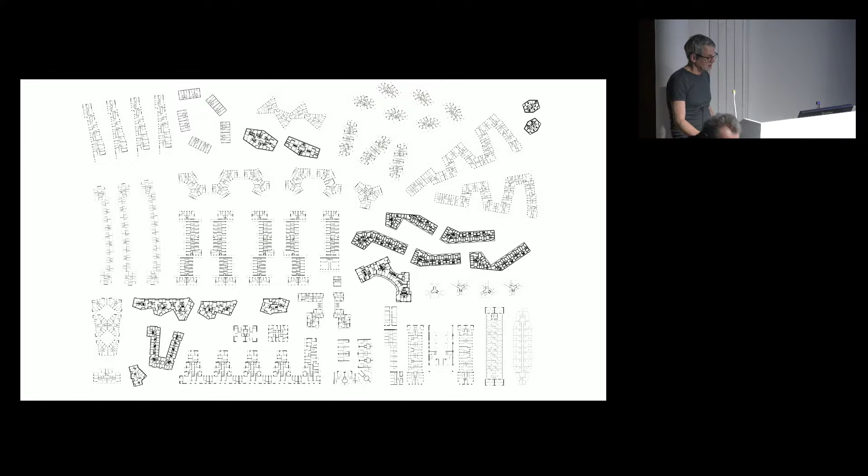Our aim was always to try and design an urban structure according to rules, like a woven material with a harmony that repeats itself and so generates its own pattern. Or to put it differently: if you were to combine our projects together into a fictional city, you can hopefully see how they differ from each other in terms of their internal logic.

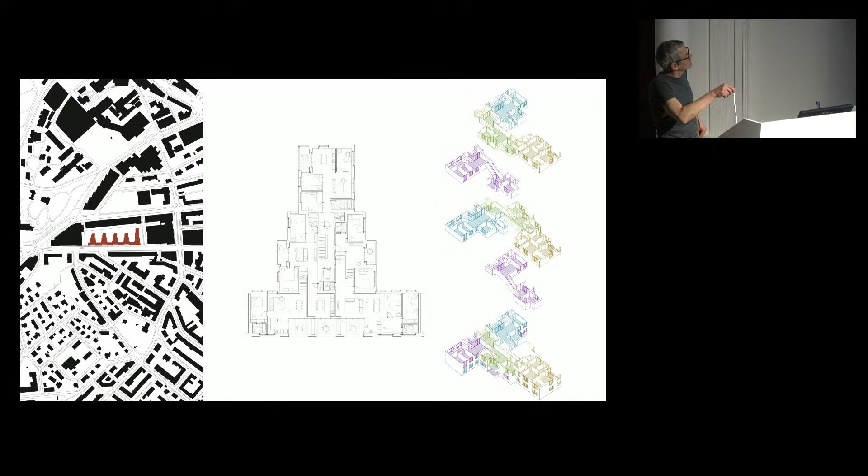For instance, during the test planning for the Oberzelg housing project in Winterthur Sennhof. After finishing the test planning in 2010, the project was suspended for 3 years. And when we started the planning again in 2013, we felt that the spaces of the buildings were not precise enough.

The angled structure symbolized driftwood that had been washed up on the construction site by the river, basically an abstract idea that had very little to do with spatial thinking.

Refining the project, we began to question our first approach. Basically, we turned everything inside out. Beforehand, the volumes of the buildings were determined by the internal layouts. Afterwards, it was the sequence of outer spaces that now defined the center of the housing estate.

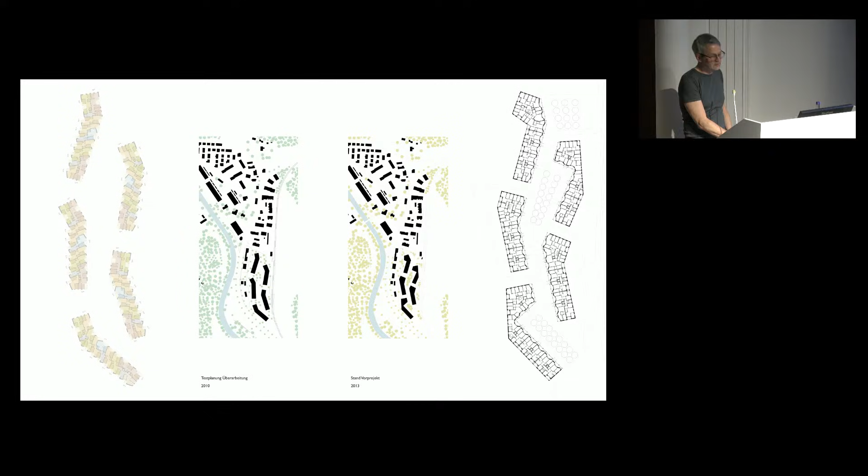The impulse for this involved 3 elements: the public space leading to the railway station, a lane as a threshold to the courtyard of the housing project, and another lane leading to an open space facing the landscape.

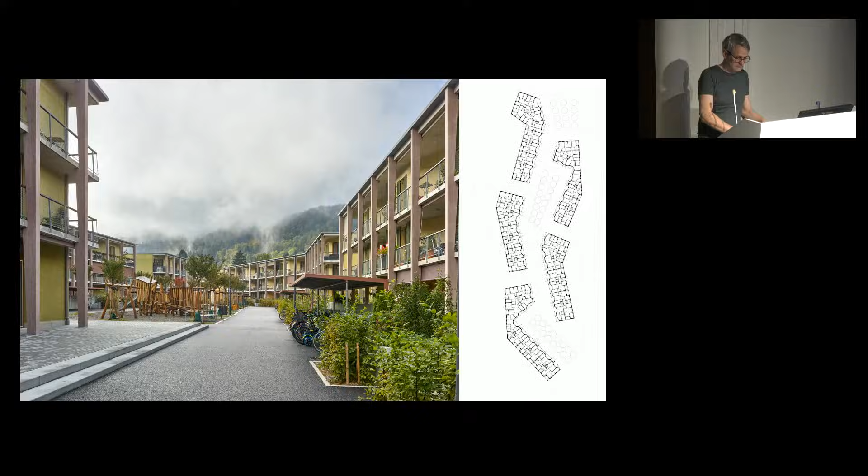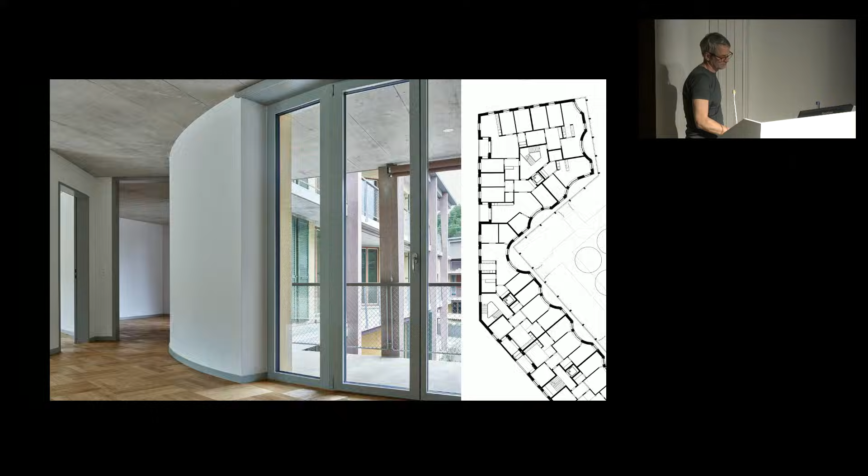Essentially, we cut the outer spaces into the buildings, clearly expressed in 2 volumes where the building mass is reduced to the depth of a room. This project fixed our idea that outer spaces have a greater impact on the design of a housing complex than the buildings themselves.

In 2013, we won the open competition for the Maiengasse residential development in Basel. The building site is located in a courtyard in Basel, close to the Ringstrasse in Greater Basel, not far from the Rhine. The courtyard had formerly been used as a workshop yard with a wooden shed in the middle, surrounded by old cars and other junk. In one spot, someone had made themselves at home—a workshop yard, but at the same time with a domestic touch.

The aim in this case was to try and keep this semi-private, open atmosphere. Our concept consisted of a bracket that spans a courtyard within the courtyard. At the same time, this architectural device encloses and organizes the outer spaces.

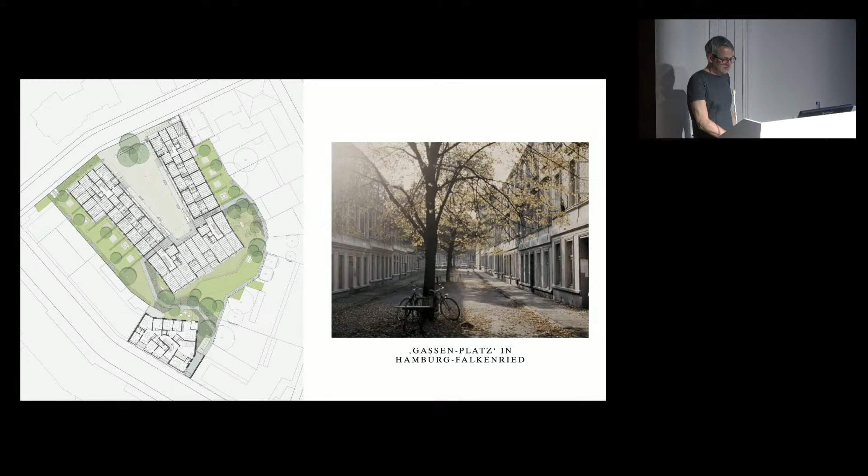Green areas run along the outside circle of the perimeter building block, serving as private gardens for the flats and the children's nursery. In the center is an open courtyard, a street space available for residents to use as they want—meant to provide scope for possibilities, empty and therefore flexible. Added to this, the closeness of the communal areas and the private living space along the courtyard required an architectural answer, a threshold that clearly marks the crossover from private to public.

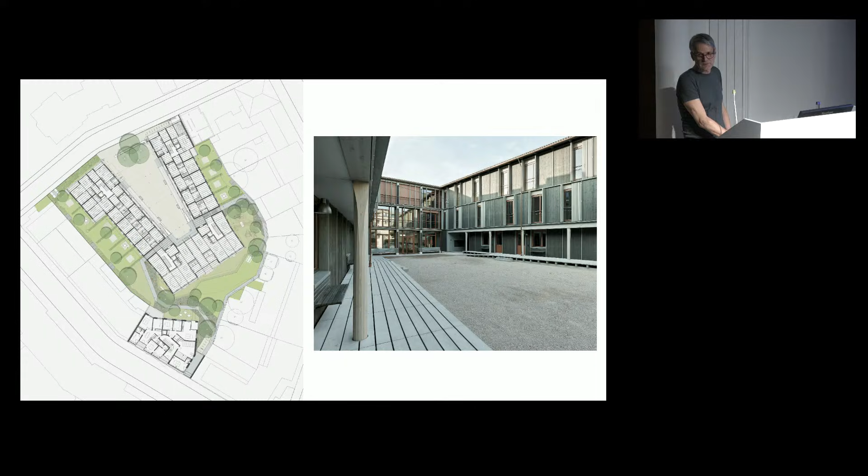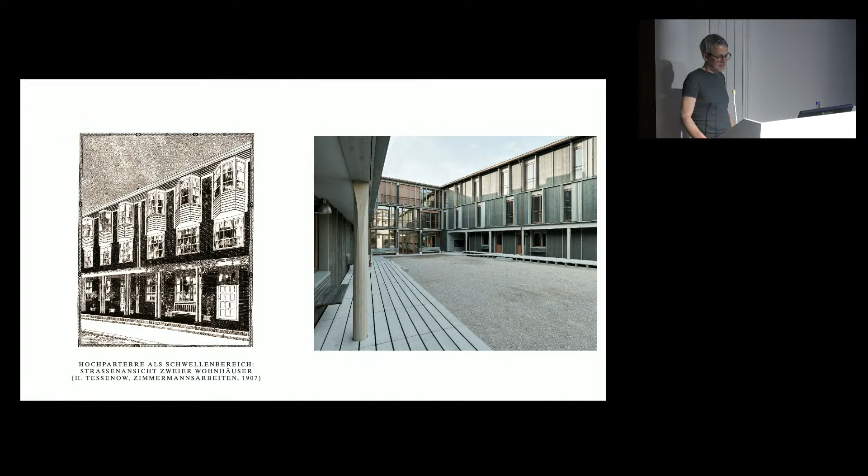By inserting a plateau, we created a higher ground floor and moved the facade back to form a covered entrance area.

Along those areas, we developed maisonette flats that extended over 2 floors. The entrance to the flats leads directly into the kitchen diner area. The space then became more and more private, with the living space located further back and the bedroom on the other floor.

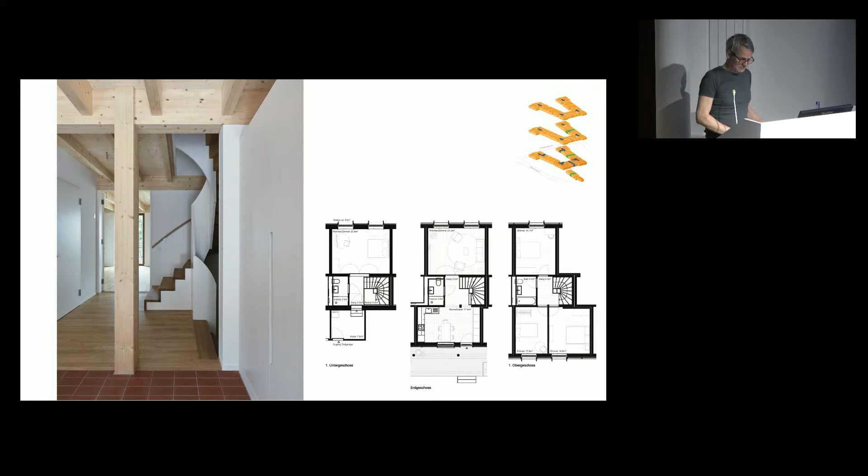The key thing is the empty middle, with the houses grouped around it, which provides a stage for the residents to then fill. An empty middle is always undefined. It's not us who say how it should be used. Instead, it's the community, the residents, who decide how to adapt it.

Our Kuppe project in Horgen is similar to Maiengasse. Horgen is located on Lake Zurich, and the site has an incredible view, which is why most of the existing buildings in the area face out to the lake.

Our development is different. It is self-contained, taking an opposite approach. The clients wanted to promote the feeling of community, of living in harmony with nature.

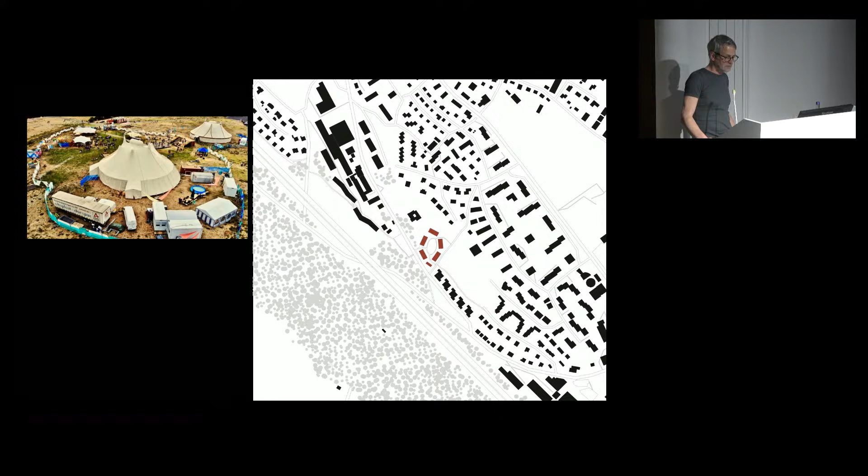The idea, therefore, was to organize the housing units in the form of a circle of wagons. As in Basel, the hope was that the middle would focus an idea of shared community.

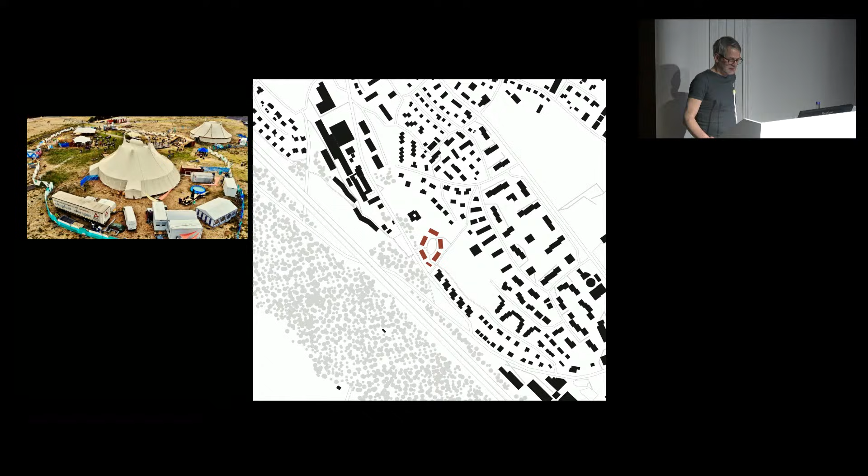The development is part of a new neighborhood that will be built. The neighborhood is connected by a path that loops around the hilltop, and that is where we have situated our houses. As you can see, the houses are grouped around an empty meadow.

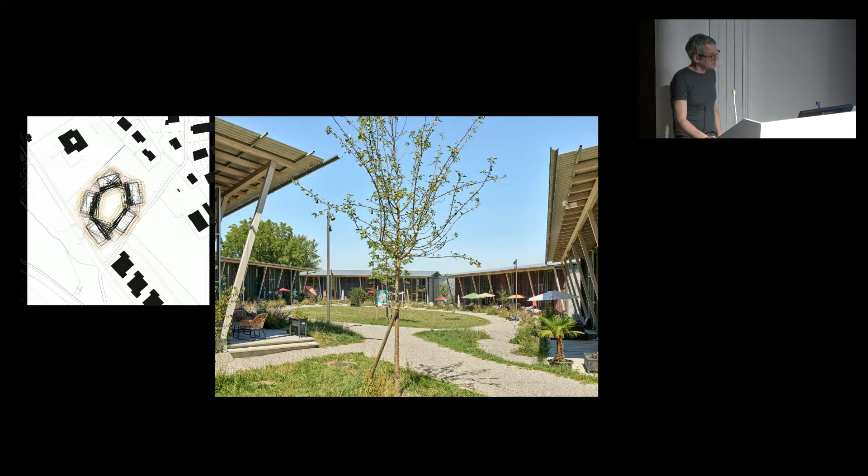The precise setting was a result of a long thinking process, where we tried to find a balance between spatial enclosure and openness to the landscape. How we then placed them represents a snapshot in time.

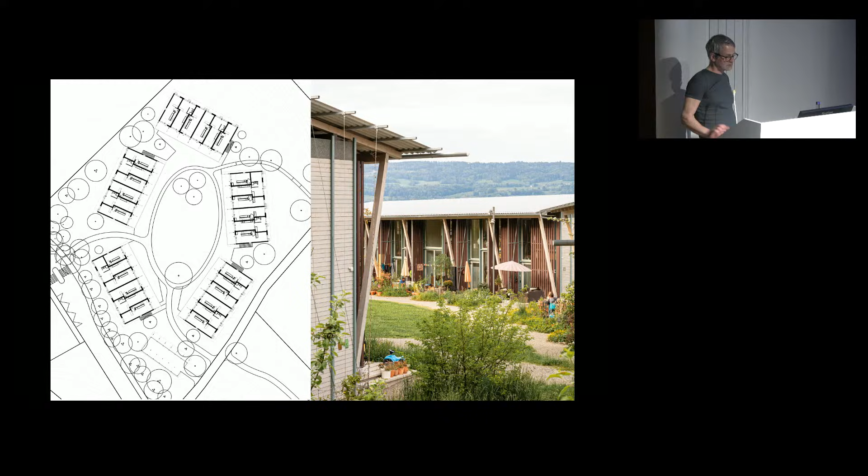The guiding idea was to express something temporary, a sense of lightness. They are additively bolted together, giving them a kind of bricolage effect.

We were not particularly interested in which way the flats faced. Some face to the lake, others to the mountains. The houses are built with bulkheads that radiate out in the landscape on all sides. All the houses are roughly the same.

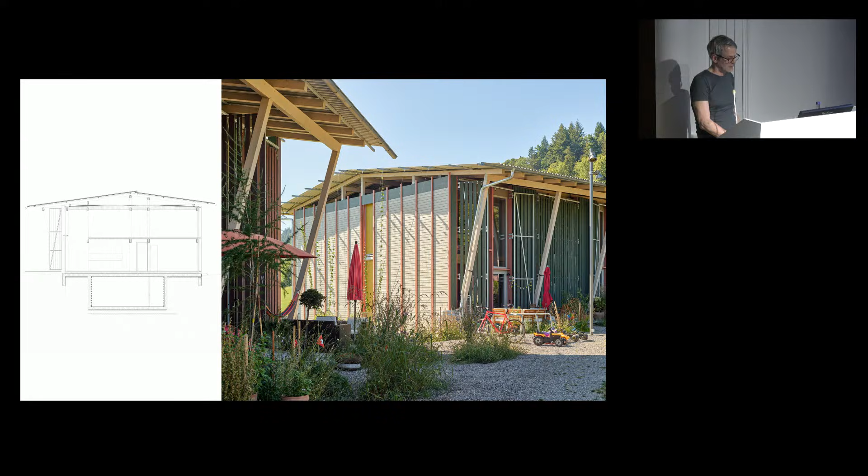Once again, this area in front of the houses was crucial. The overhanging roof protects the transition from the house to the garden, where the entrance to the flats is also located. The large doorway gates create a distance to the neighbors.

When opened out, they act as a blind to next door forecourts. When closed, they signal privacy when wanted.

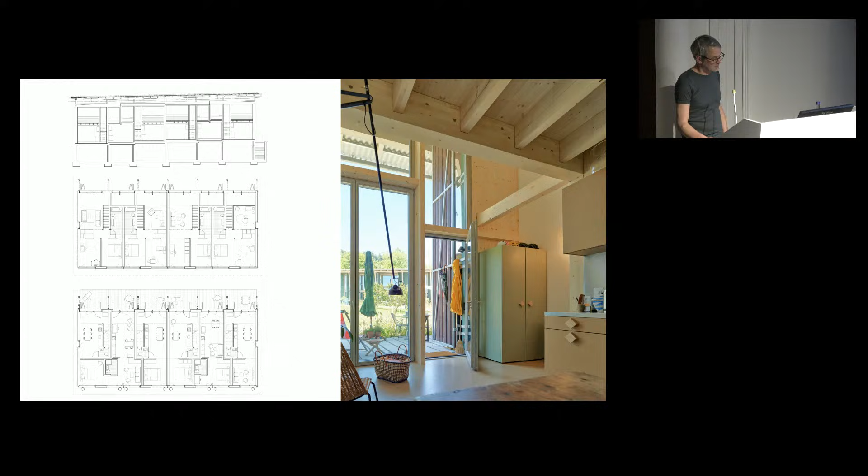Each unit is made up of two maisonette flats, making what I think in England you call a granny flat. The functional program is designed to let people on their own live right next to two families, creating a multiple generational living environment. Each unit has a two-story room at the entrance, followed by the kitchen diner space.

The flats are distinguished as a continuous space that can be furnished as the occupant wishes. Here, for instance, this wardrobe, as in the build before, is on rolls, and you can move it around.

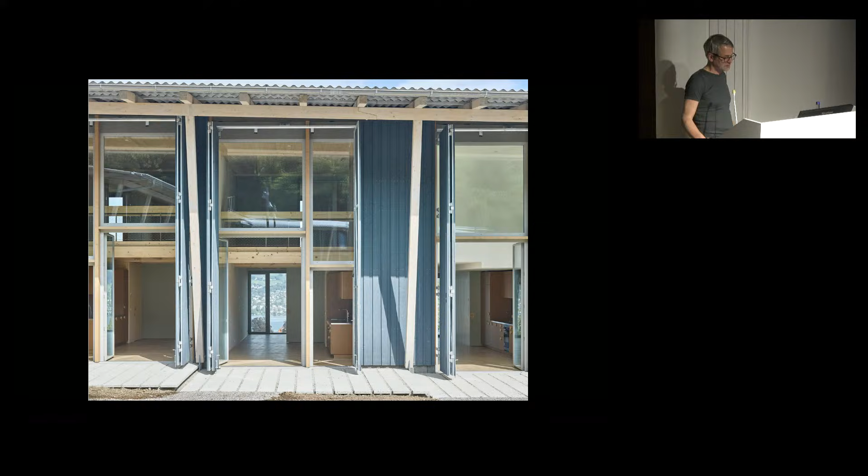The key idea is that the residents can switch as they want between privacy and community. Even in the most intimate place, you are part of the community. Here, the double folding doors from the middle, in the background, the lake.

As said at the beginning, our current project tried to take this thing further and to modify and refine it. The ideas developed in the two previous examples are refined in the Storchen housing project in Ettwil. This is a new project that we won last year as Studio Sintzel.

Working in the new constellation, what we now often do is take approaches from the Sintzel era that we reacted to and developed them further. Again, the important factor is that the individual buildings relate to each other through the outer space, thus forming a large-scale whole.

Huttwil am See is located near Zurich in the countryside. The village is not connected to the railway network, meaning that public transport is patchy. The key thing for the clients is that the development nevertheless attracts urban people who will enjoy living together in this location.

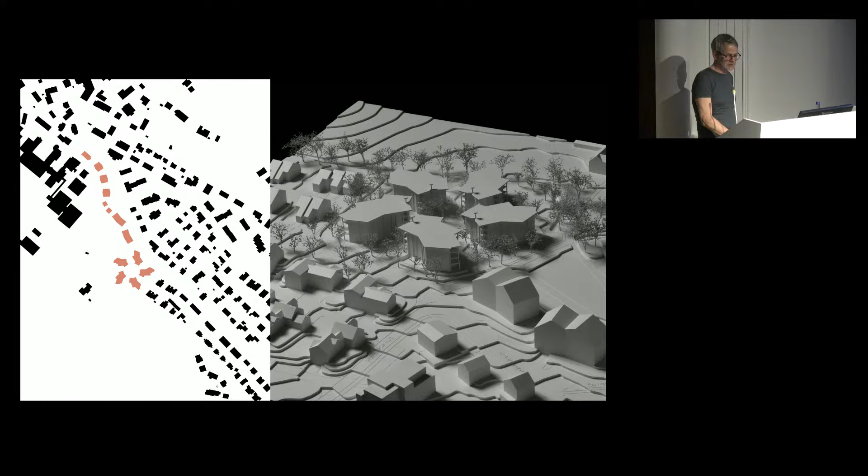The setting is incredibly simple: 5 identical structures enclosing a communal space, large enough for the residents of the 50 apartments to fill it with life. A path leads from the street into the settlement, past all the buildings, and back out to the countryside. The landscape begins in the space between the houses.

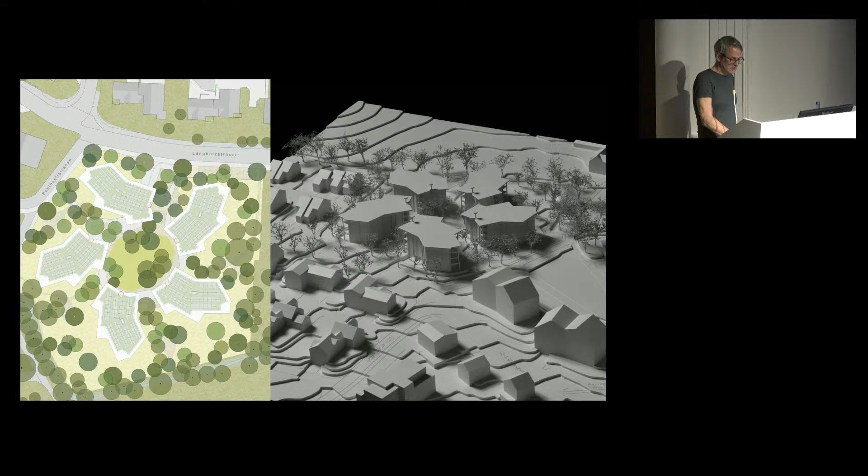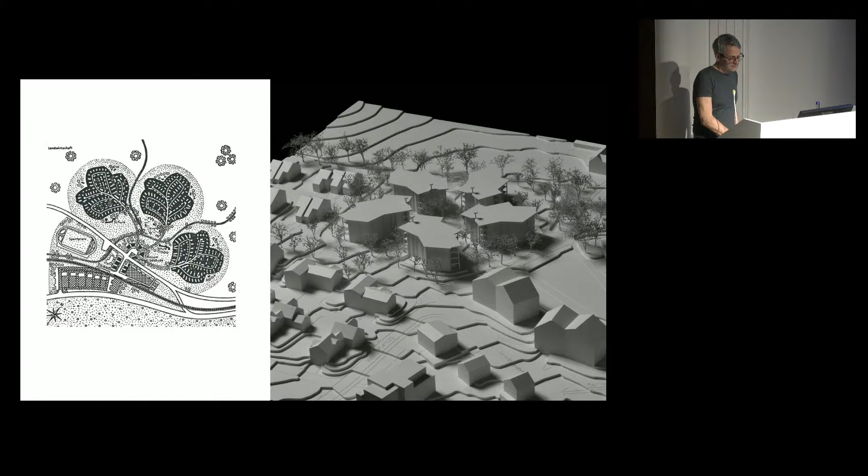A grove of trees creates the transition to the natural surroundings. The result is an urban flower, similar to Albert Heinrich Steiner's concept of the garden town expansion of Zurich in the 1930s. The rows of houses are positioned like urban blocks so that nature can be experienced within the housing complex.

In terms of social space, all levels of community have their own outer areas, with the open middle point offering a shared range of possibilities. On the ground floor, an arcade provides covered space for the residents. The arcade also houses a communal room, laundry rooms, and hobby rooms.

Hidden among the trees are playgrounds for the children, and the path leads to the brook and the neighborhood settlement. The contrast is with the individual views of the landscape from each flat out into the countryside.

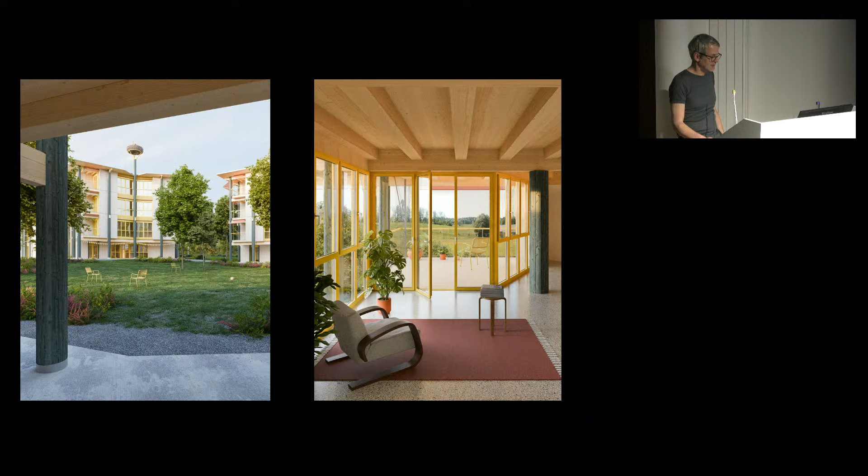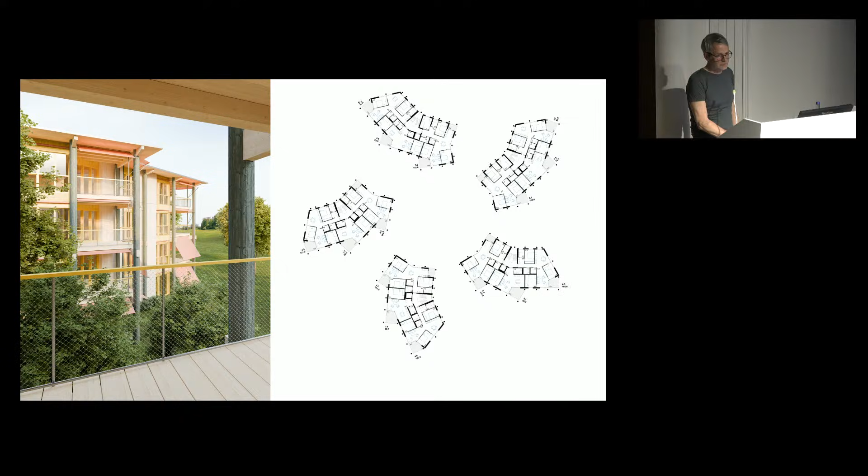The rotation of the architectural volumes around the undefined middle point and the fanning of the layouts creates a rotation with the buildings themselves, a snapshot, if you like, of a circle dance. Hence the name of the project, Syrtos, a Greek circle dance.

The pièce de résistance of the design is the fan floor plan, with two large flats embracing a small one. The fan shape allows the small flat to face two sides. The large flats face three or even four sides.

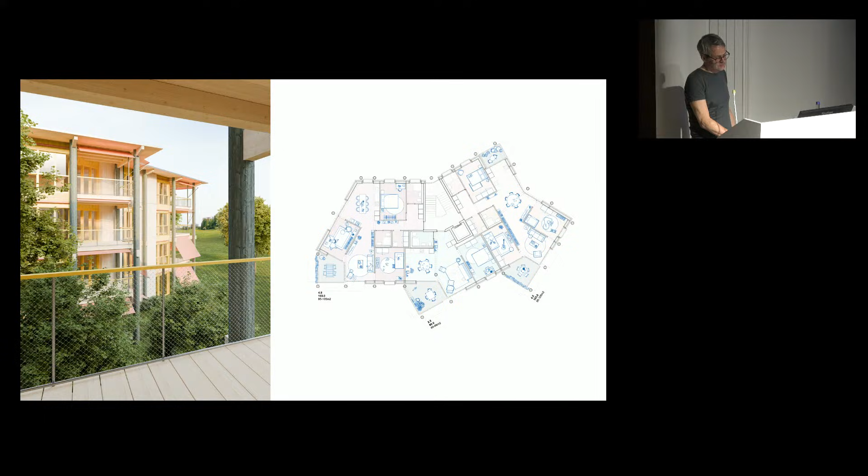We designed the project as a timber construction to give the facade depth. The structural timber columns are situated on the outside. At the angle, the column rises above the level of the roof and supports a stork's nest, hopefully giving a coexistence between animal and humans.

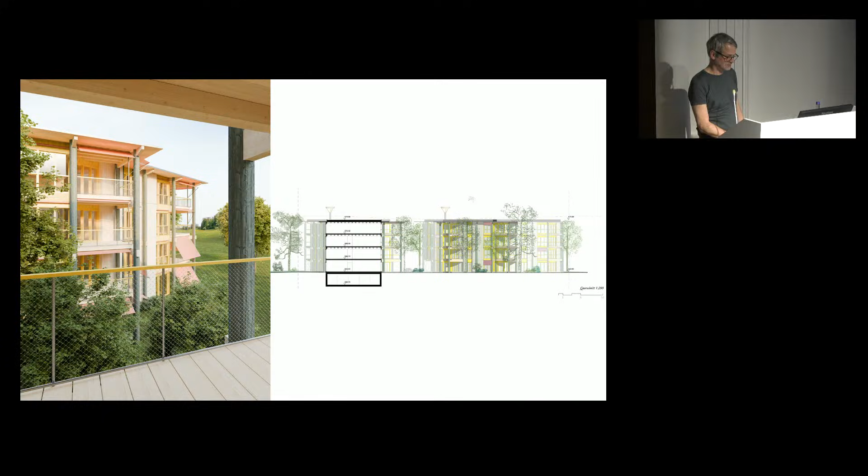Conditions like this in Huttwil am See are rare. With sensitive density, the greenfield project was widely accepted. The result is a pure idea, a built diagram, if you like.

The situation becomes more complex when existing buildings are involved. When a new design has to be adapted to an existing structure, the architectural requirements are usually the same, but the solutions are usually not so clear-cut.

Last year, while at Sintzel, we won the project for the Denlerstraße housing development in Zurich, together with Ramser Schmid architects. The construction site is located in the west of Zurich, in Altstetten, a former industrial district.

By Zurich standards, Altstetten is highly densified, with residential development and new office buildings. The program includes around 500 apartments, commercial spaces, and restaurants on the ground floor, a daycare center, a nursery school. In other words, an urban body in itself.

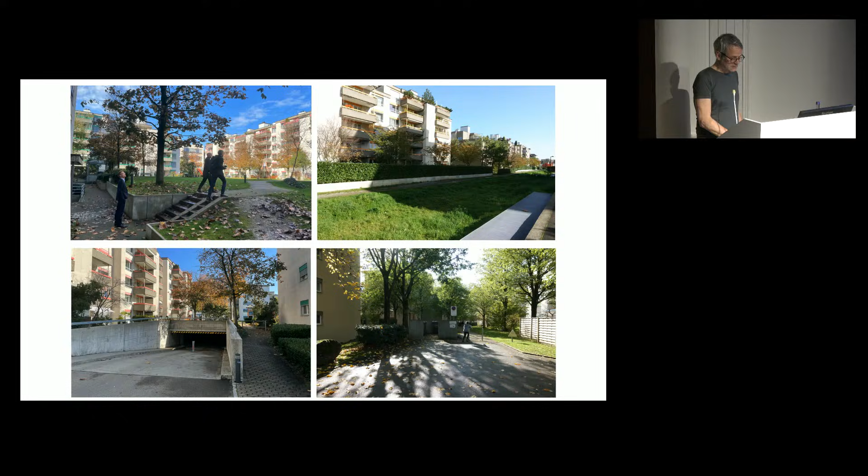Local building laws mean that existing developments can be densified, making old building stock more attractive for investors. The buildings are freestanding, surrounded by greenery, set back from the street and the edges of the plot. There are no connections to the street. Every floor is inhabited, including the ground floor.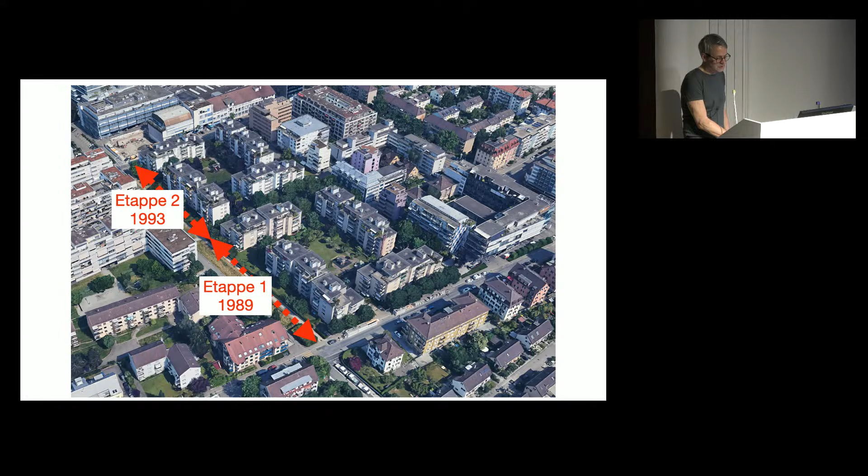The existing buildings were built in two stages, the first in 1989 and the second in 1993. Considering climate concerns, it was clear that the existing buildings could not be completely demolished. However, the question was, how much should be kept?

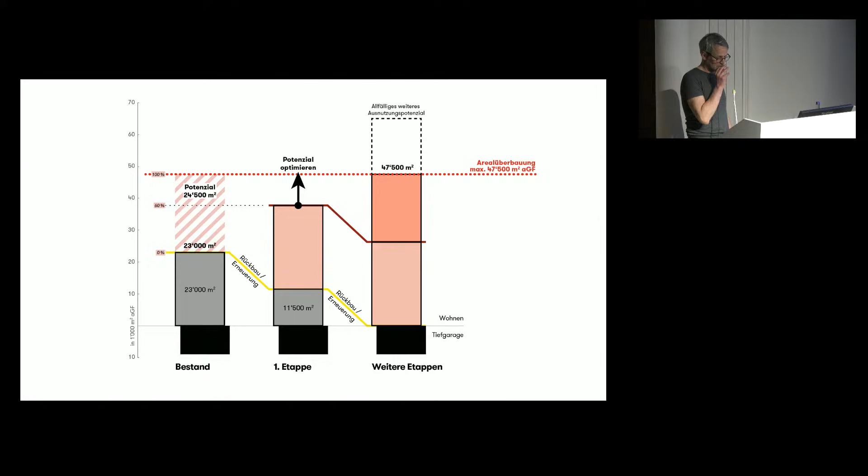This diagram shows the investor wanted to double the number of residents. The basement with the parking areas is to be kept and new buildings constructed above them. But in times of climate crisis, it's not just a question of what is worth keeping, but what can be kept. Therefore, we tried to keep as much of the existing buildings as possible, but still had to make a careful decision about what to demolish and what to leave standing and integrate into new development.

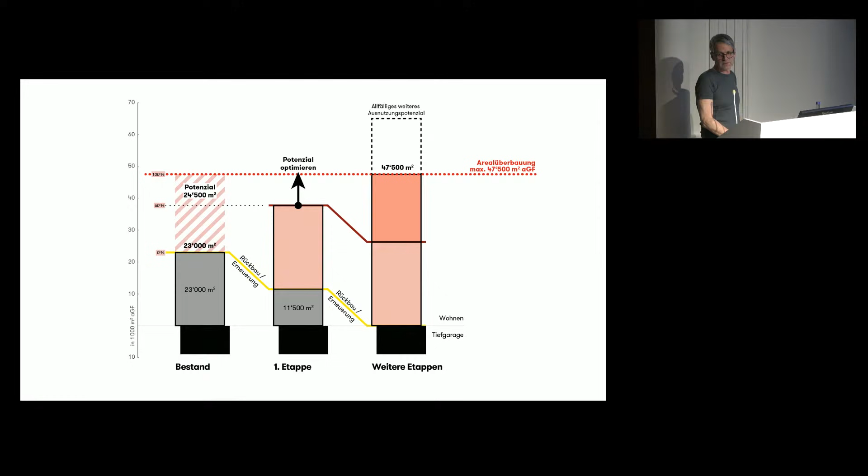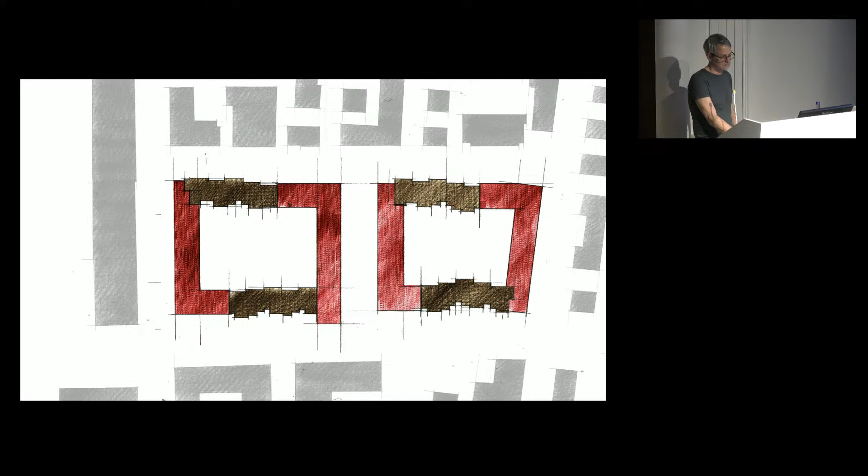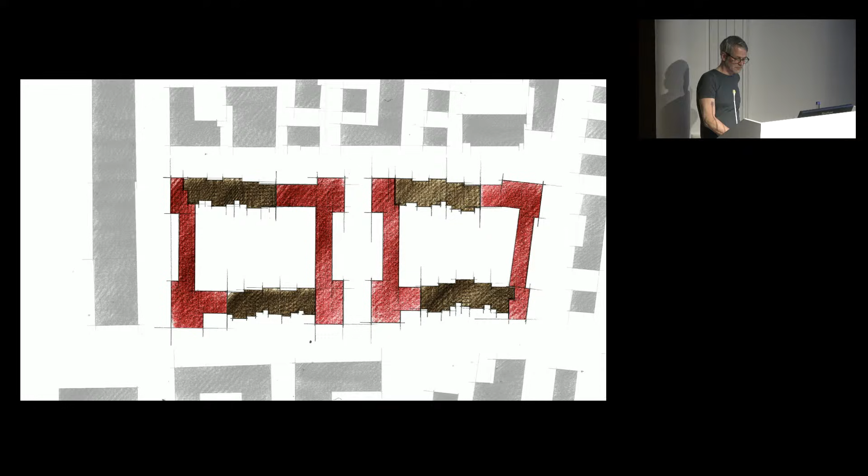Then we wanted to give the area in the middle a clearer spatial framing, from the structure that shapes urban space to the space that shapes the building structure. The density was still too low, so we built into the courtyards.

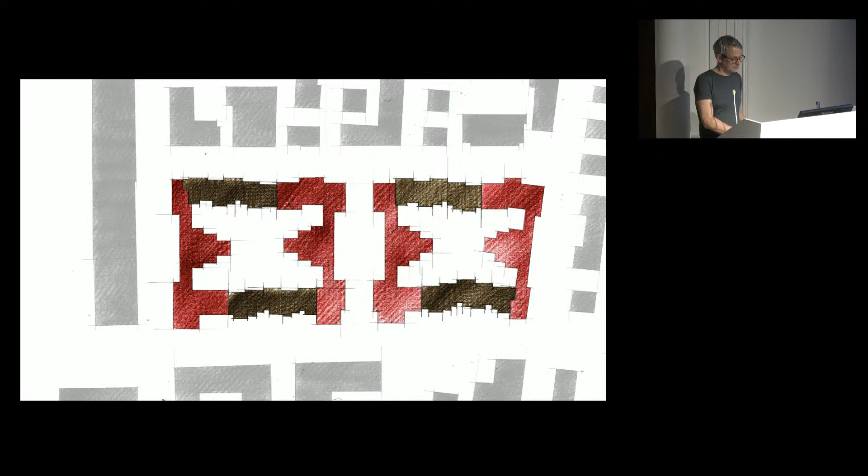Like this, we were able to transform the open development into a closed courtyard edge development. However, this also meant changes to the existing structure.

The living spaces in the existing blocks are strictly south-facing. In the classic boundary block development, they would face the street, and entry would be from the outside into the buildings. For this reason, there is now a path through the courtyard where the entrances to the southern ribbons are located. The functions in outdoor spaces are mixed.

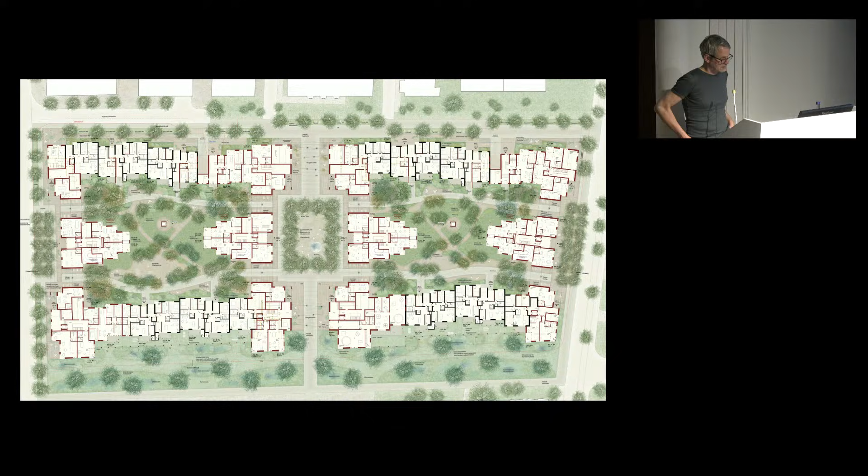The existing buildings still spring backward and forward, but are now held firmly in place by the new ones.

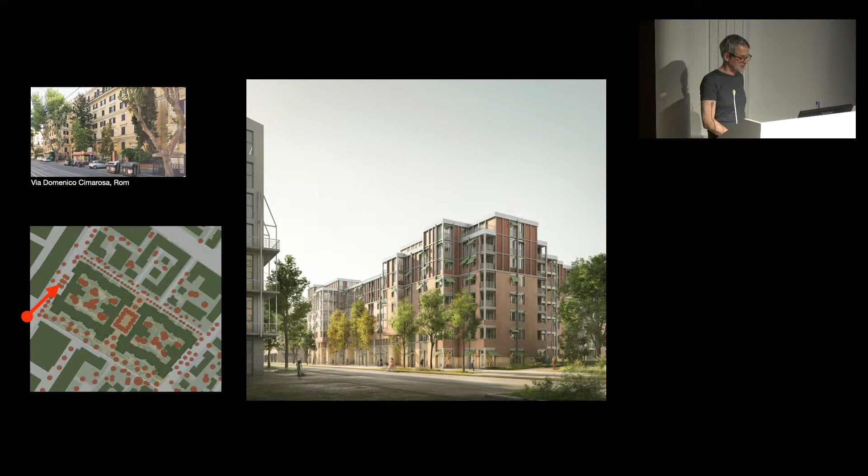At the same time, the mixture generates a series of recognizable classic urban spaces. Here, two courtyards, a neighborhood square, and a street space with commercial uses.

That is the end of the presentation.

Thank you, Stephan. That was absolutely beautiful, and beautiful also in the pace with which you tell it, because we can feel, in a sense, the sense of inhabitation as being the thing that really defines the qualities of these buildings. I would like to open this up to questions now.

Yep. Yeah, that was really, really great. I think you're right. What I was thinking of a lot when you were showing these projects, and in the final set of slides when you showed the examples of Roman architecture, is architects like Vico Magistretti. Do you know those guys in Milan who were rebuilding the city after the Second World War? Okay, in Milan. Yeah. Oh, I don't know. I know that Adam Caruso wrote a book about Asnago Vender.

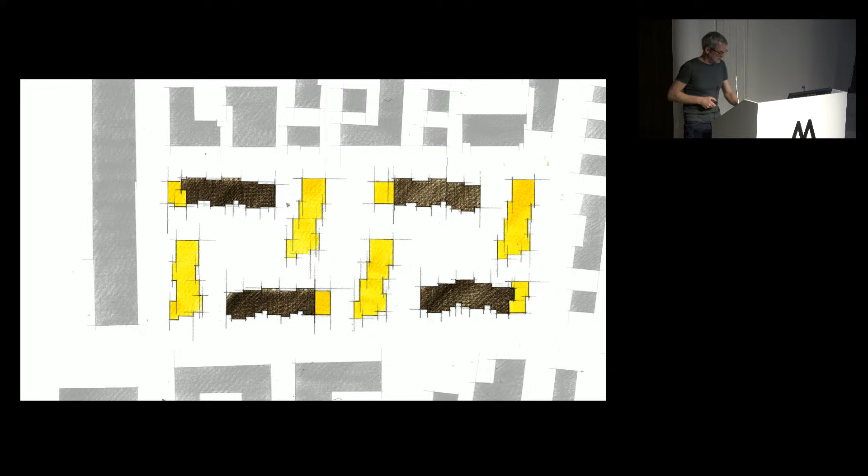The problem with the situation as we found it was that the buildings are not fixed on the ground; they're swimming around, and you can't just take the whole buildings down. So when you have that, we wanted to do it in a rectangle system to put it together, so we also had to make some hybrid buildings which have half of each.

Actually, here it is - you have a staircase, and on this side you have the new building, and on the other side you have the existing building, and they come together. This is now for planning. It's really complex to get it together, and this was necessary to get a rectangular system, because otherwise you couldn't fit that together into edge blocks, or perimeter blocks actually. Thank you.

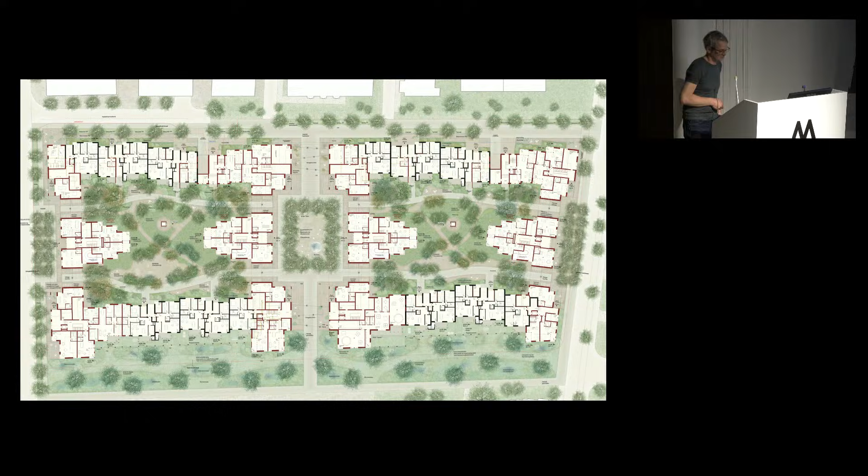I've really enjoyed it. Perhaps it's a project before this which used the aerial photograph of the circus tent and the buildings around it, and it made me think of a group of people who put their umbrellas up to shelter from the rain, and then turned to talk to each other. Whilst that was a distinct party for that project, there's actually that sense of buildings being umbrellas. There's an overarching presence of the roof, the eave, which seems very strong, and at the scale of things you've been working on to date, it's a very powerful presence, wherever you are, within the house, immediately outside it, and beyond it.

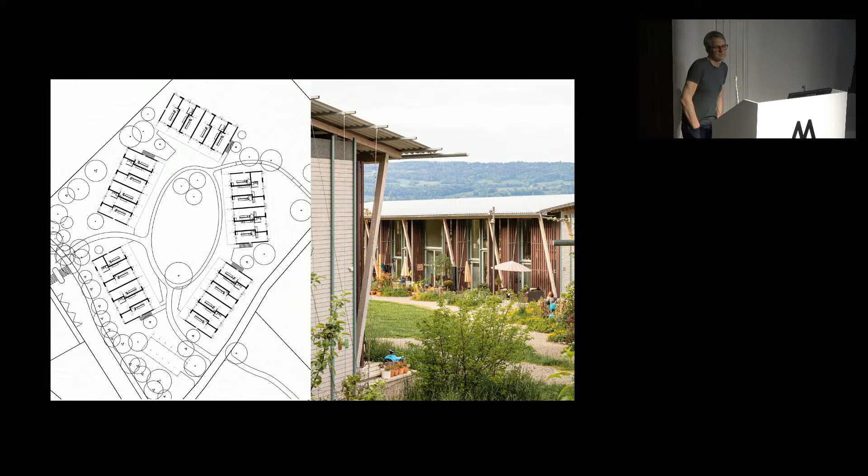There is a confidence in that phrase, and I completely agree. I'd say the same thing, that it's these spaces between the outside space that we're looking at and looking for, not the object buildings. Yet most architects would fall back on a version of a more formal geometry to reassure themselves they've found the right configuration of outside space. And yet you have the confidence and the freedom to, in a sense, explore it—it's quite prototypical, like primitive forms of settlement, in the making of your plans. Maybe.

But I guess my question is, how do you know when you've got it right? When do you stop?

Oh, this is when we have to hand in. It has to—I mean, this is purely the deadline, right?

Yeah, this is all. You have doubt about if it's right, or you can move a bit. But actually, in this case, we also had the law of Abstände—the building law—which we had to work around. We had certain meters to reach.

Also, this is difficult—it's a kind of thing we developed from the first setting on, and then the story gets richer, and we figure out, for example, about these gates. This was a moment when we thought that the houses are too near to each other, and this was an idea that when you open a gate, you have distance to your neighbor. This is also, in a way, something which we know from the Landschaftsgebäude, from the country houses.

No, not from the landscape—from farmers' architecture, yeah, genau. So, buildings that belong in a rural landscape, reminiscent of farms or small settlement workshops and so on.

Yeah, and how about your plan layout? Because your plan layout had a certain typological insight, that you have certain types in your layout. Do you do certain research about local events, behavior, and their habits, and how do you conduct the research? Sorry, not in detail. Oh, no, I can't say something to this.

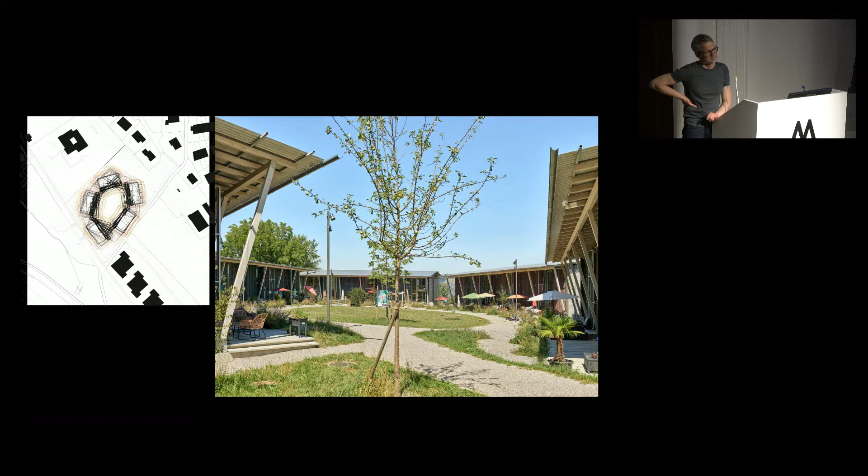Thank you very much, it's a lovely talk. I think threshold is a wonderful word, and it already starts the emotional fixture of the scheme as a whole, the sense of activity and something special. Could I ask you how the residents come about in your schemes? I mean, do people know of your development before you start, and do you know them, like in a housing association or whatever? Or is it speculative and then commercial?

No, this Maiengasse, this is the city of Basel who built these houses, and it was just for rent. I mean, there's no community behind who developed this project. It's just social housing from the city, actually.

So are people allocated to it, or do people choose to come? Normally they need to have children to get in. When you want an apartment with 4 rooms, you need to be 3 persons, actually. This is the rule. So.

And in one of the schemes, I think I heard you say the column was higher than the roof. Yeah, this is it in the end. This is about the Storchensiedlung.

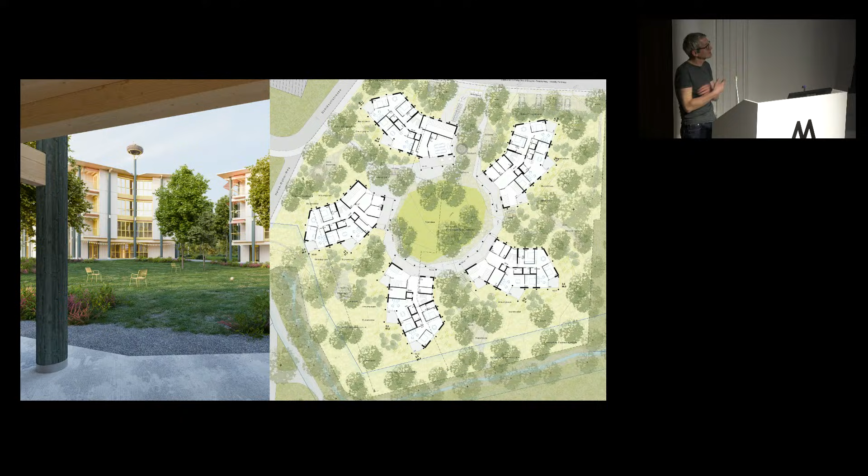That's the bird, the stork. Yeah, so here, has the bird gone up? Yeah, here, this is the program here. On this construction site, there's a nest of storks. Well, six storks we have to habitat here, and this was the idea that they...

Irene, did you have a question? I would, thank you very much. It's a beautiful work, but I would like to hear a little bit more about the clients you work for. Oh, okay, you mentioned already some municipality in Basel, and...

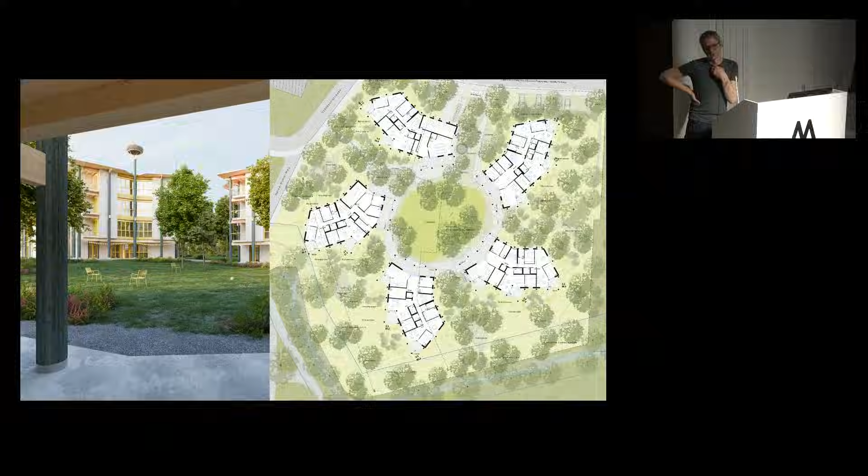The work is of very high quality from a design point of view, and are you one of those rare people who are able to do this kind of work? In other words, does it rely on an enlightened client, or is this a normal situation as far as Switzerland is concerned?

And also, do you work for developers? I think you do, is that right? What, do you work for private developers, commercial developers? Or as this here in Oetwil am See, there is...

A clinic, a psychiatric clinic, which has land around the clinic, and they developed this apartment housing, but they want just normal people who live there. This is not the sunniest place, and then they have not so high return on this investment, actually.

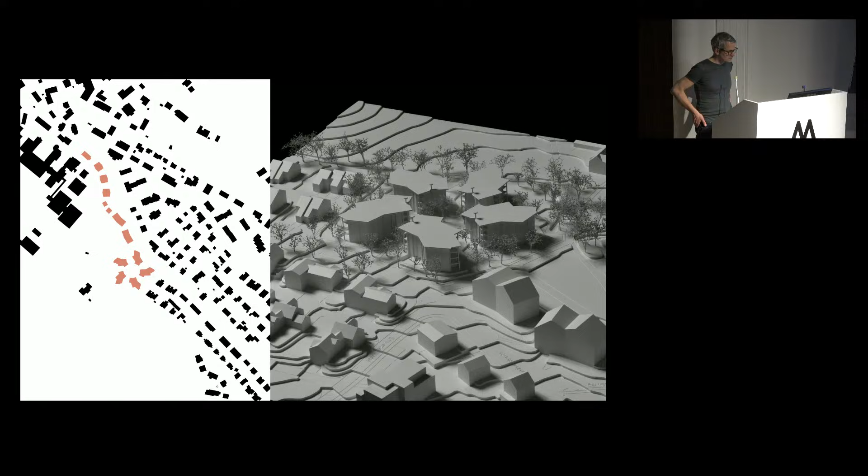Yes, and in Basel, this was just the city, and in Horgen, this is a kind of society who wants that they have also here in Horgen, they have no cars, so they live together on this hill, and not everybody can have a car. They have just a few...

Parking possibilities, and this is how the people for this project are also chosen, because when people use a car, they don't get there. But this is just here. This is really special, actually.

Is this your question? I mean, Maiengasse and Storchensiedlung and Denverstrasse — these are by competition, we came to this project. So we participated in this competition, and then we won, and yeah.

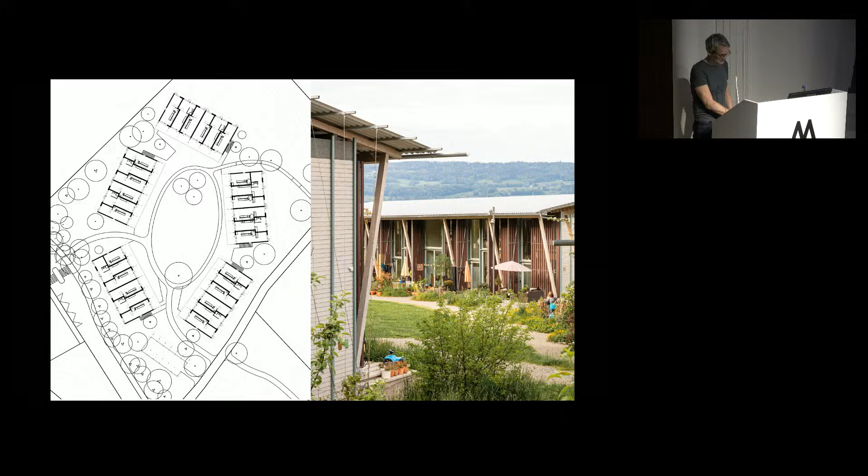There's a couple of themes that I feel very curious about. You mentioned one of the themes was that you were learning from the pattern or the style of building in the landscape, from things like farmsteads and buildings familiar to us in a rural landscape. And so it seems that you take something of their sense of spacing, but also sometimes oversized elements, and bring these into conjunction with spaces that we often think of as perhaps only small in terms of their necessity. So the wonderful photo you showed us of the huge doors opening to reveal an entrance that then looks through to a window.

Yes, and where we see the lake beyond. And this sort of juxtaposition of scales, is this something that you reflected on from landscape buildings, or does it come from something else?